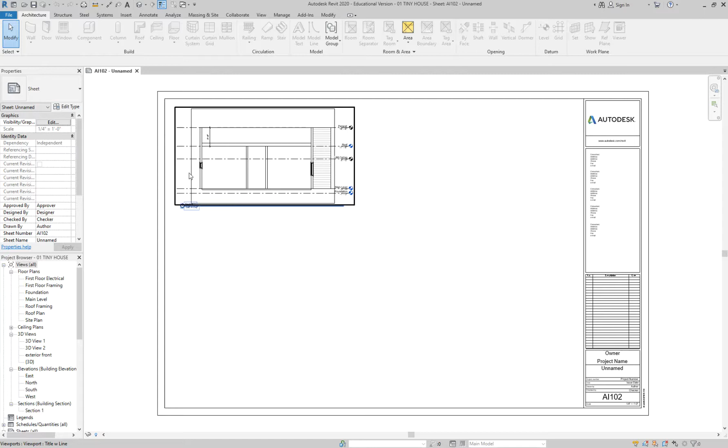So as I mentioned, I'm just going to make a quick section here, and then what I'm going to do is undo everything and go through the whole thing step by step. Again, not taking quite as much time because it is a review, but at any point if you have questions or need me to slow down, let me know.

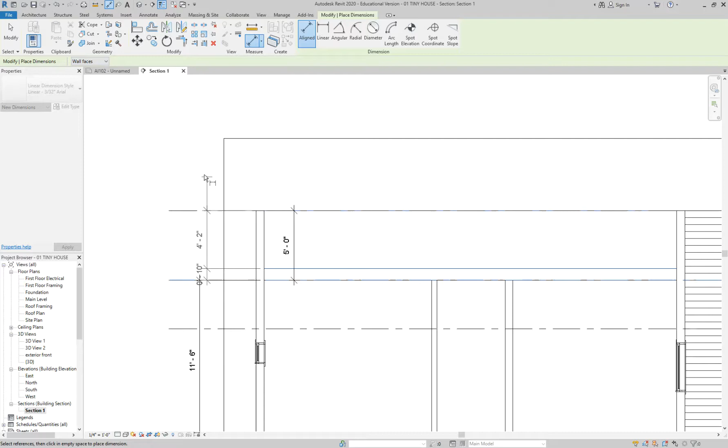So coming to section 1, I'm going to do it in the actual section. I've got my floor here at 0, and then we put our roof starting at 11.5 feet, and then I have a 12 - I guess I did a 10-inch roof. That should have been 12. I'll fix that. And then I've got a parapet that's 4 feet 2 inches.

The other thing that I should also mention that's not shown here, I'm going to do this with the reference plane, is that I also wanted to take into consideration that there is - I erased my drawing, so I can't remember if I did 1 or 2 feet of ceiling plenum. Was it 1.5? Okay, so here's the 1.5.

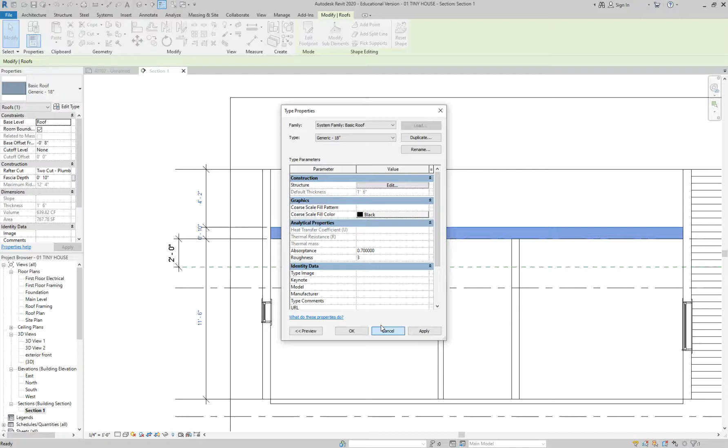And got my roof there, and what I'm going to do real quick is edit my roof type, because that should be 18. Let me go take a look at that. Yep, it says 1 foot 6 inches, but it's also saying 10. That's so strange. Let me play with this real quick. I don't think that should change anything, but I'm just curious.

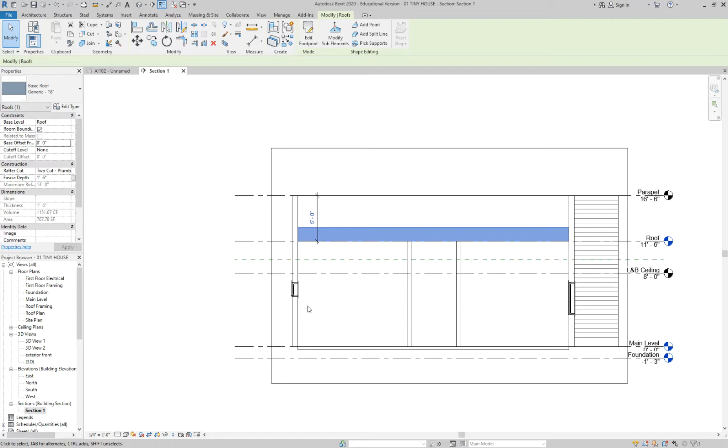Okay, so let me go through and redo my dimensions real quick. Okay, so these are the dimensions that we'll work with.

Okay, so for this particular project, we are going to put the bottom, or our ceilings, at 10 feet. Not all of them, but most of them at 10 feet. We'll have 1.5 feet of plenum, 18-inch structure, and then 3.5 feet here to serve as our handrail. So those are the dimensions I'm going to use just for this example.

They may have been slightly different on Tuesday, but this is what I'll use to drive. And in fact, have that line, that dotted line - the reference plane, that's okay. This one right here, yeah, that's just a reference plane for me before I get this started.

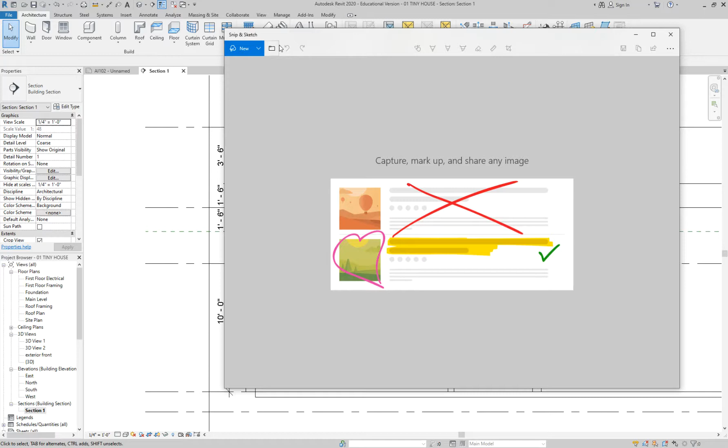So I just wanted to keep this here, and what I'll do, I'm going to do a little snip of it so that I can come back to it and show you guys what we're working with. That way you guys will have these notes at home instead of just on the board. So that's what we'll work with right now.

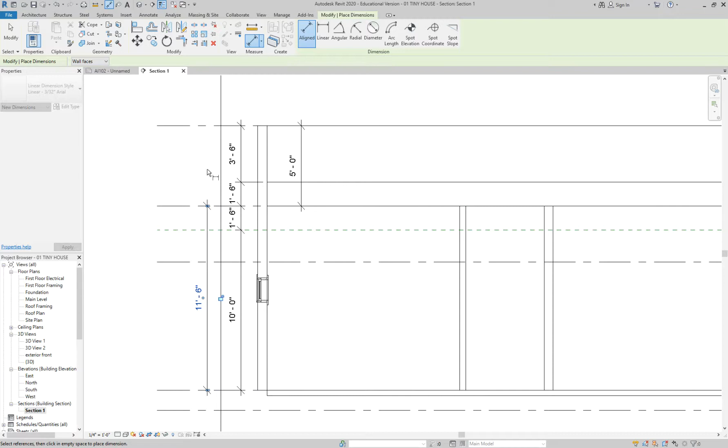And actually, one other dimension I'm going to put in, since we don't have this dimension right here, I'll just do it right here to the bottom of that joist right there. Whoops.

Heather, does that help a little bit? Because then you'll at least have this one right here. We can add this one later. So let me take one more snip.

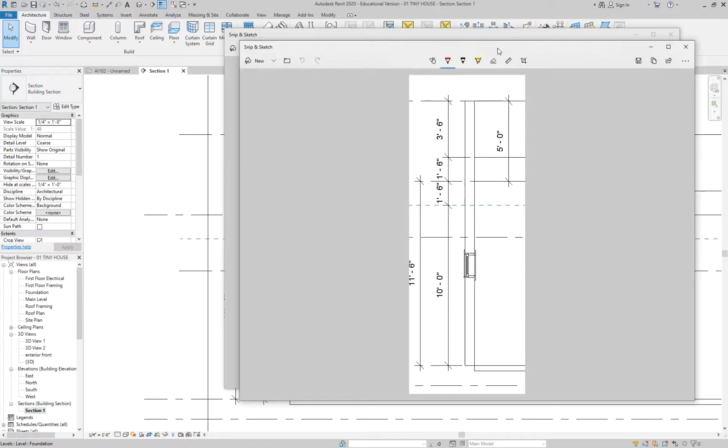Okay, so I'll keep pulling this up just so we see what our dimensions are. I'll scooch it over to the side for now. But what I'm going to do is I'm going to come to my main level, and before I start working, I'm going to undo some stuff.

So I'm going to go to my roof plan, and right now I can't see my roof. Can you guys tell me 2 different ways, or maybe even more than 2 different ways, that I can select my roof from this view?

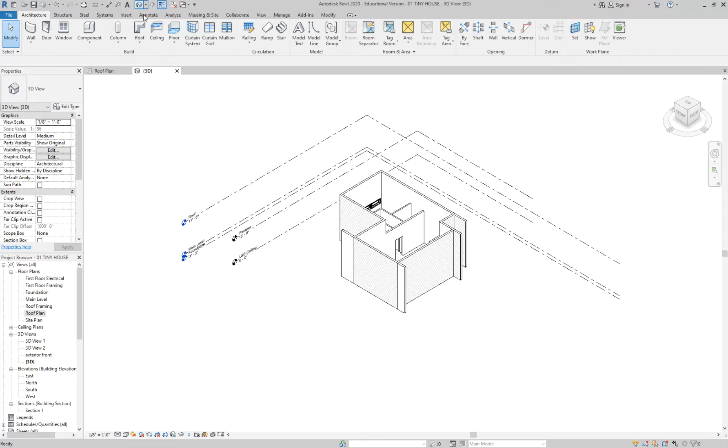Yeah. Yep, so I can hover and I can hit tab and it starts going through and eventually it finds my roof and I can hit delete. And then the other thing that I did in the last class is I had the 3D view open too. And let me do Control Z. That also allows you to go into the 3D view, select the roof, and then I can come back to my roof plan and keep working on it.

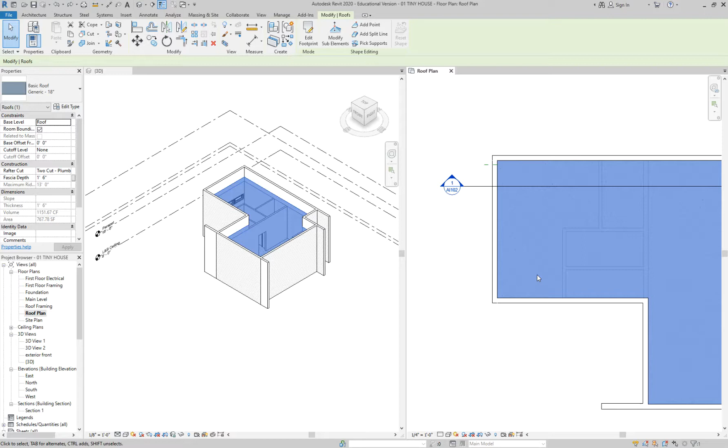But you can select things in different views and then return to a different view. Does that make sense? I think in the last class I gave this example with the floor, not the roof, but they're just, since they're both planes, they work similarly. Okay, so I'll delete the roof to get started.

And then the other thing that I'm going to do is, when I started class last week, let me actually go to an elevation view. I didn't have all of these different views. I just had the roof level. So I'm actually going to delete the parapet, and I'm even going to delete the laundry and bath ceiling for now.

Okay? So I've deleted the level that these used to go up to. So now when I click on them, do you see how they've been unconnected? Because that level is gone. Do you guys remember a way that I can quickly select these walls and take them back to my roof level?

What was our little cheer? Catherine, do you remember? Hover, tab, click. Good, yep, so I hover over one wall, I tab, and it gets a good majority of them, but not all. So I clicked to select them, now they're blue.

Do you guys remember what key I can hit to add walls? Good, so right now I'm hitting Control. On my screen I can see a plus, but you may not. And I'm just going to keep holding Control until I get all of these walls right here.

So right now if I look at my properties, my top constraint on all of those walls are unconnected. If you do that, you might see nothing. It might be blank. And sometimes it's blank if your properties for those walls have more than one property. Like if one of them was unconnected and one of them was still connected to the roof, it just wouldn't show anything, so it wouldn't contradict itself. Does that make sense why it would be blank sometimes?

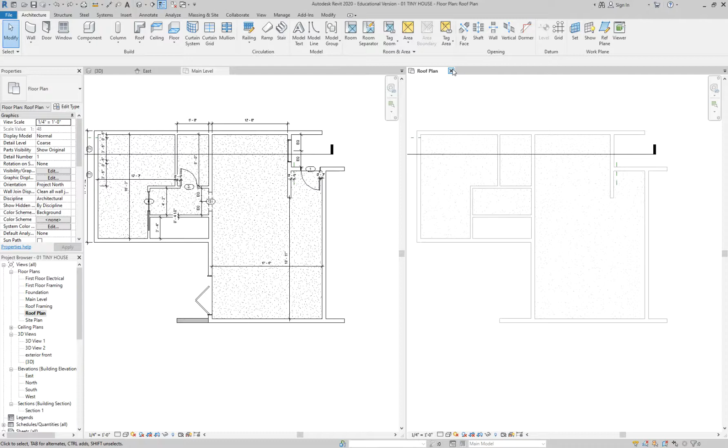Excuse me. Let me do this real quick. Give me one sec. I'm going to see if I can reopen the tiny house. Woohoo, I didn't hit Control Save, so I'm right back where you guys are.

So let's go to our roof plan. And the first thing, can I ask one question? Absolutely, you can ask questions at any time. Why, maybe this is a dumb question. No. Why do you have to create a section to edit your levels? How come you can't just do that like in an elevation?

Oh. You do the same thing in an elevation. Kind of. Let me show you why. Brooke, do you mind shutting the door for us? So the reason why I did it in section, let me just show you the difference.

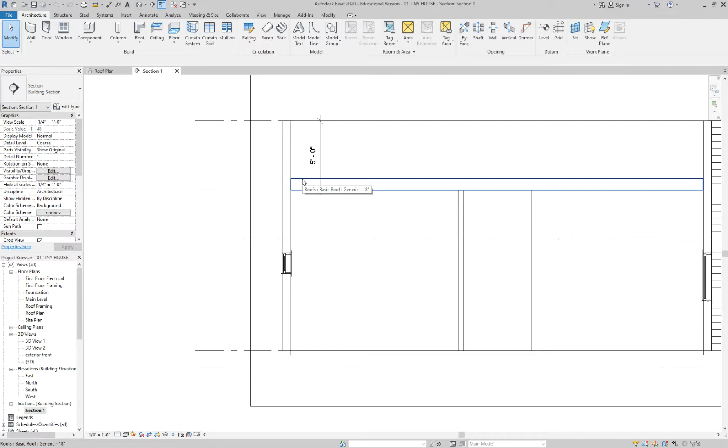So in the section, I can see the floor. I can see where the bottom of the roof structure is. I can see where the top of the roof structure is. But in elevation, do you see how, especially right now, I just see the top, or the top and the bottom?

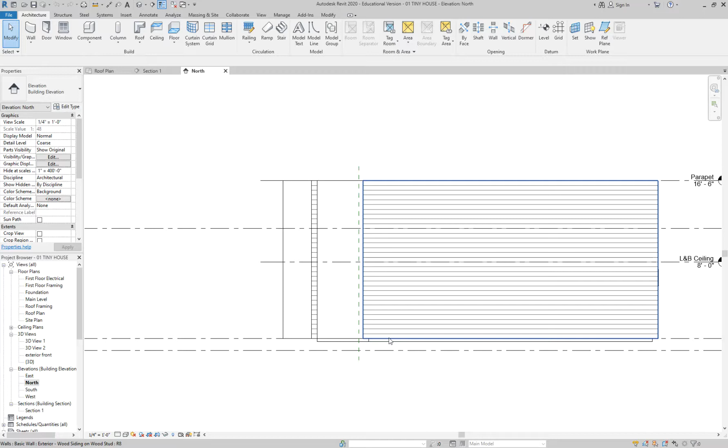So by cutting through the building, I get to see more of the structure, so I can actually see where the levels are. Does it matter where you cut it? Because you cut it in one specific spot and told us to cut it there. The only reason I did it there is that if I cut it here and told you guys to go through the kitchen window, if somebody else didn't go through the kitchen window, maybe they wouldn't see those two walls.

And what would happen is they would stop listening to me and wonder why they don't see those two walls, where's that window. Then 10 minutes later they'd be like, wait, I lost you. So really that was just me trying to get your screen to look like my screen.

But you can really cut them anywhere as long as you're cutting through what you want to see. And luckily for us, not even really luckily, we're just trying to work with the floor, the ceiling, and the roof. So we could essentially cut it anywhere.

Yeah, you could look at it the other way too. Yep, I like the voguing you're doing.

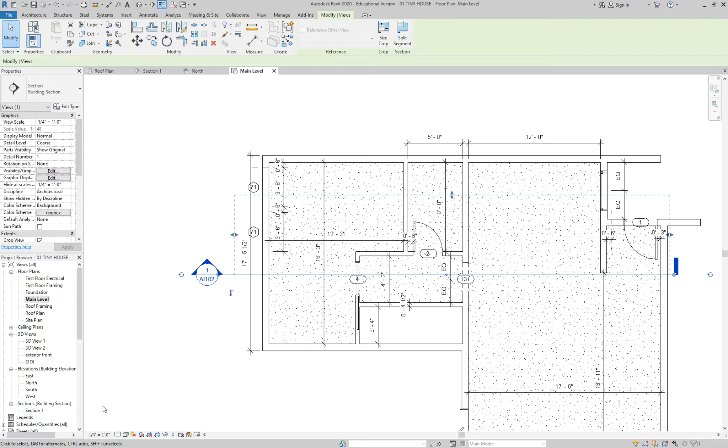Now the other thing that will matter later today, when we start putting in our ceilings, remember how I said the laundry and the bathrooms are going to be lower? That will matter, because if we took our section and moved it back here to the hallway, that doesn't show us anything. If I go back to section 1, see how that hallway doesn't help me see where the laundry and bathroom ceilings are? So in that particular instance, it would matter.

You want to cut through the bathroom. Yeah, but for now I'm going to undo that. I just hit Control Z, it went back to the old view. I'm really just worried about the roof and the floor relationship, and eventually the parapet.

Okay, and you can make as many section views as you want. Yes, they're free, as many as you want. The only thing I ask is, when you turn in your plans, see how mine is placed on a sheet right now? If you have one that isn't placed on a sheet... oh, we haven't gone over that yet, I'll go over that a little later. I'll put that as a side note. If we get to it, I'll get to it today, but it's actually next week's lecture.

But I'll show you how you can turn these off without deleting them. Yours says it's on a sheet and mine is blank. How did you put it on a sheet? Same as any other view. If I go to my browser, here's section 1, pretend that's a floor plan. How did you get your floor plan? Just a drag and drop right onto the sheet. So any view within your browser is really just a drag and drop onto the sheet. Okay, those are all good questions.

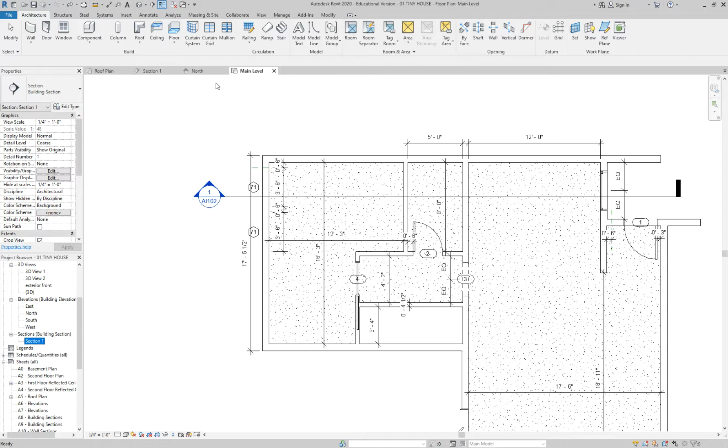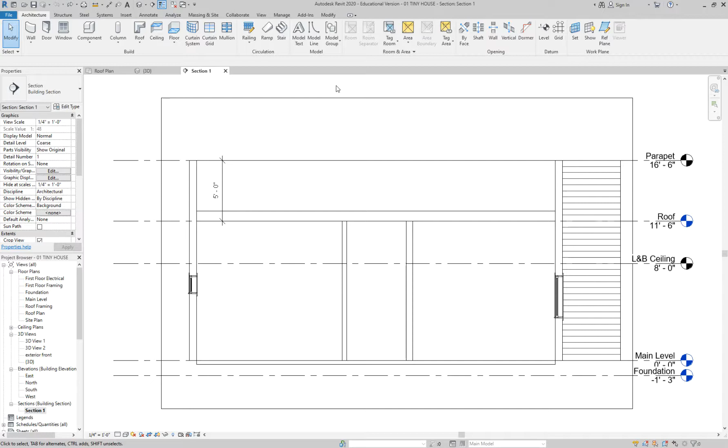All right, so now let's go through and try to clean this up, starting by making our screens look similar. I'm going to go to my roof plan, close out of my main level, and get the 3D view and our section again, then let's tile those. Wow, this never happens, I got it first try. Woohoo! So this is where I'll meet you guys.

All right, I don't hear as many clicks. Are you guys ready to start undoing?

Okay, first thing, let's get rid of our roof. As Julianne mentioned earlier, you just hover over any of these walls, don't click, and start hitting Tab. For me it was 2 tabs before it found it; for you it might be less or more, but you'll see on your cursor it should say Roofs, Basic Roof, and then click. You should see it highlight in your section view and in your 3D view. Now it probably would have been just as easy to come into our section and hit delete, but it was good practice, I thought. Okay, then go ahead and get rid of it.

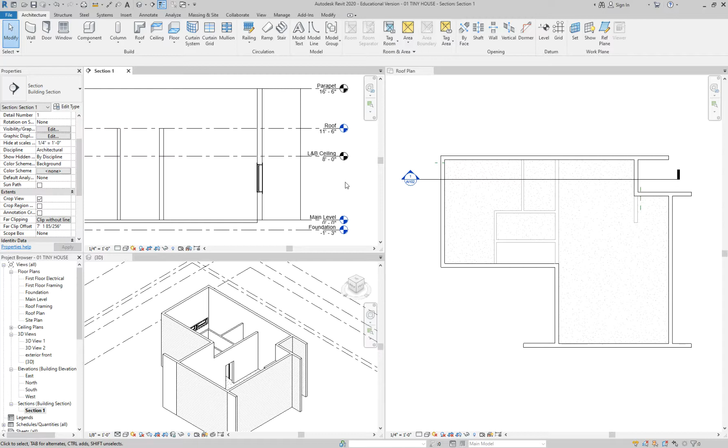Before I delete too much, Heather had a great question last week. She was asking why in our section and even in our elevations, some of these are blue and some are black.

Blue is what Revit is trying to copy from links online, like when somebody sends you an email with a link, it's typically blue. So if something is blue, it's a link. Right now, section is highlighted and these two are grayed out, see that?

When I double click on that blue marker, it takes me to the roof plan. Now roof plan is highlighted and section is gray. If I double click on the section head, it takes me to the section. So it lets you navigate towards the different plans.

It links to them. Now with this laundry and bath ceiling and the parapet, these are just elevation markers. They don't have plans or views associated with them, so that's why they don't link to anything. Let's grab these two and delete those as well, doing that in my section view.

After that, let's try our hover tab click in 3D to get our walls back down to roof height. Go ahead and give it a try. I'm going to come hover over one wall, hover, tab, click.

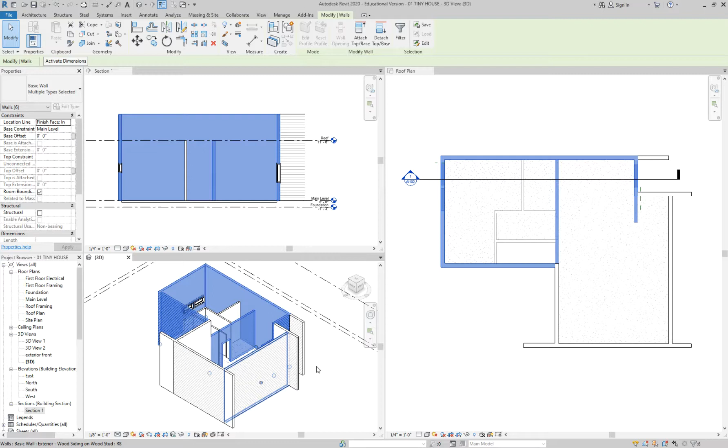Now in this instance, if you look at my screen, see how it got an interior wall that I don't want to select? I'm going to go into my floor plan and try that one more time. Oh shoot, it didn't get it. But to deselect something, you hit the shift key - not delete it, to deselect it. So control to add, shift to take away.

Eventually, once you get all of your walls, remind me where to go from here. So from here, I want to do top constraint. They're all unconnected, and I want to move it down to roof.

This is interesting, I didn't notice this. Do you see that it says basic wall, multiple types selected? I didn't realize that I even had different types of exterior walls. So I will do all of these - we did wood siding on wood stud, right? I'm going to change all of those to be the same.

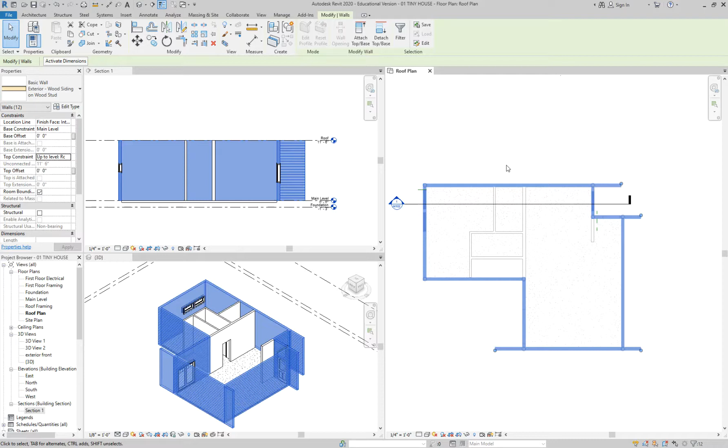Once you get that done, let's give it a test by taking our roof up to 12 feet, just to make sure all of those walls move up with it. And then take it back down to 11.6.

So you just put in the elevation height there then? Yep, you should be able to first just click on the elevation marker and then one more time to activate the number - one to activate the number. Everybody got that okay?

I've got a wall that is not happy. That's okay, so what you can do, you don't have to grab all of them at once if you find that it's giving you trouble.

If I go back to my 3D view, let's say that when I do my hover tab click, it only gets those 3. Well then, go ahead and change those 3, and then you can come on the next wall and do hover tab click again. The hover tab click is just to help you quickly select walls.

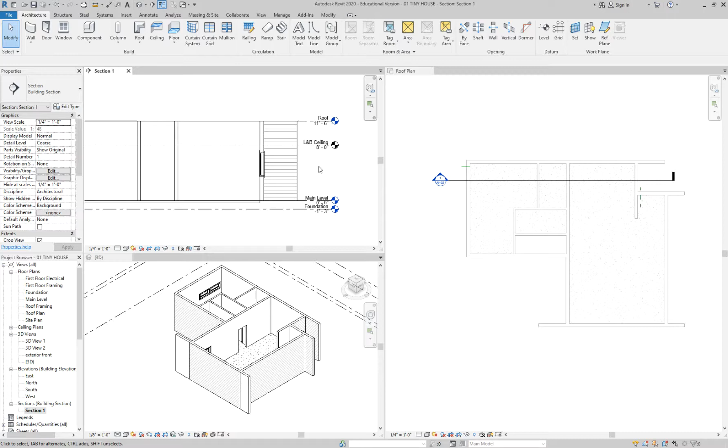I'm just going to call it L&B ceiling. Did we have that at 8 feet about? Okay, let's do 8 feet there. You can check your work if you did the level correctly by looking to see if this is blue or black.

How did that work for you guys? Good? All right, ready to move on to the next thing? So the next thing we could do now is start drawing our roof and then extend the parapet up. Does that sound good?

When we're working on our roof plan, we are creating a boundary. Tell me a couple things that you guys remember about boundaries. What should you try and avoid? Okay, we'll go in a circle. Catherine, I'm going to start with you. When you're drawing boundaries, tell me some things you should try to avoid that might make it so it doesn't create a roof or a floor.

Overextending your lines. Yeah, yep, so make sure you don't overextend, right? Julianne, what else? Kind of the opposite of that. I wasn't paying attention, I'm sorry.

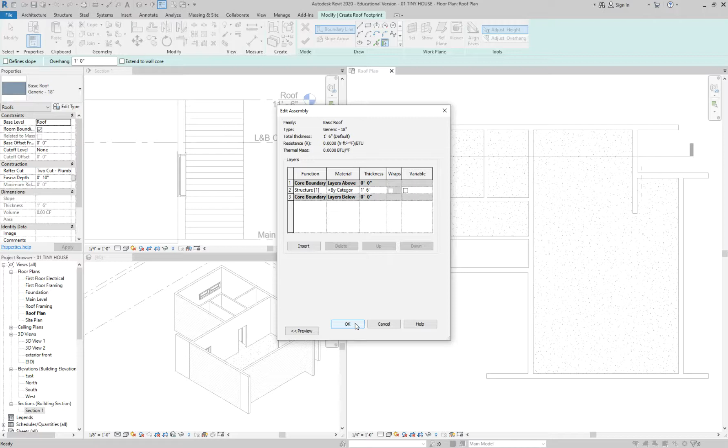From here, I like to use the line tool to draw, but you guys can use any one of them. Let's just go ahead and sketch around that perimeter.

So that's filling in the roof from 11 foot 6 on up to the 13. Since I'm on the roof level, 11.6, and it should go up 18 inches. We'll see if it's going to be nice. I had to change some things at the beginning of class to make it look right, so we'll see what it does today.

So when I do my roof, it goes on the floor. Make sure you look at what level you're drawing on. See how right now I'm in roof plan? What plan are you in right now? First floor. There you go. Right, now look at my screen again. What do I need to do in order to actually create a roof?

Green check mark. Did the green check mark haunt anybody since Tuesday? Not yet? Okay, it might. Just remember, if you get stuck, this really light blue kind of crest color is trying to help you. Just click on it and look for that green check. It essentially won't let you do anything until it knows that you're done drawing.

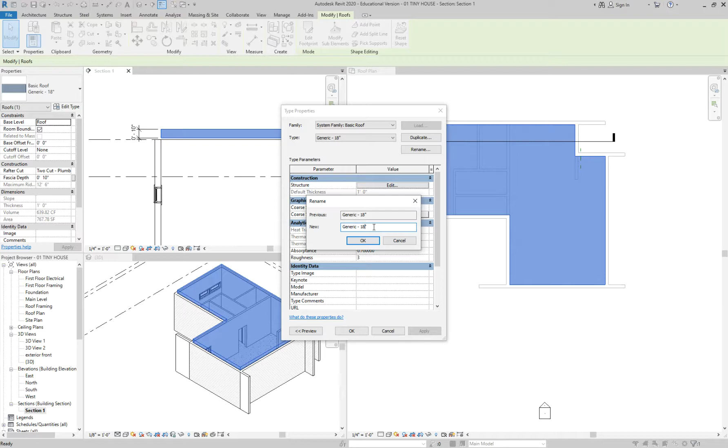Oh, whoops. I should have duplicated that because now I say 18 inches, but it's only a foot. So let me do that the right way. Now let me rename it and make it 12 inches. So this time I am actually renaming it. Oh, but it's already in use. Okay, cancel that, sorry, and it says that there's already one. Yeah, so cancel it. Select your roof and just grab the generic 12 inches.

Interesting. And let me know if that changes anything or if it still is 10 inches. Mine brought it down to 2 inches now. Really? Crazy. 10 inches? Okay, all right. So Heather, I will fix yours too, but for everyone else, I think this is what's happening.

So do you see right now under construction it says the fascia depth? So on a roof, essentially when you're looking at the front of a house, there is this part of the roof. Let's just say that the house comes up something like that. This right here is called the fascia. So it's essentially the face of the roof, just this little part right here. And right now the fascia depth is being set by Revit to be 10 inches, but the actual roof itself is 12.

Since we've done a flat roof, I think what Revit is trying to do is compensate, and so it's taking our roof and squishing it so that we don't have an angled roof for the fascia. Does that make sense? Typically, if you have a sloped roof, you have a whole bunch of roof for that fascia to butt into. We don't have a sloped roof, we have a flat roof coming into it. So what I'd like you guys to do is match your fascia depth to our 12 inches. Change that to a foot, and the roof should fix itself.

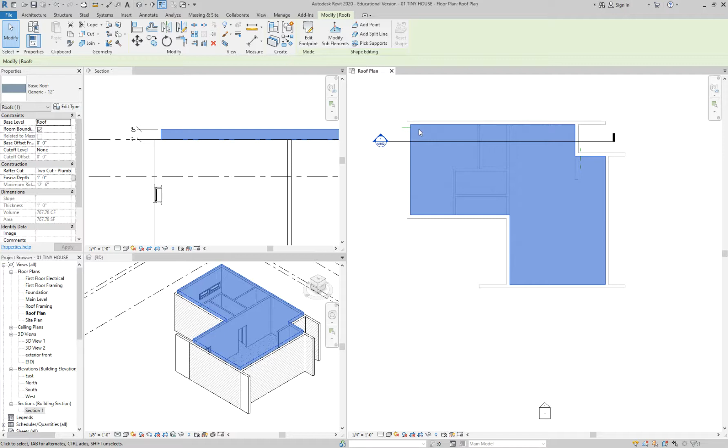Okay, so this is kind of a new feature. I've got a question here. Go ahead. How do we get out of this blue screen? Ah, it won't let you escape out of it? What you have to do, you see a green check mark? Oh yeah, okay, so the X I don't want was still there. Yep.

It heard me say, has it come to haunt you? I'm going to get somebody. And it just happened to get David.

Okay, so far so good, everybody. So something new: if you're doing a flat roof, your roof thickness needs to match the fascia thickness. In previous versions, Revit automatically compensated for this, so there must be a new modeling feature, or maybe manufacturers complained their fascia was being shrunk to fit a roof it didn't fit on, so now they're shrinking the roof to fit the fascia. So if we had an 18-inch roof, we'd need an 18-inch fascia. And in a flat roof, you actually don't even need a fascia.

Right now, with the farmhouse style, it's going two ways. People either have a really thick black fascia or none at all. There's a few houses in Holladay where it just looks like a brick house with maybe a 1-inch reveal of the roof because they've hidden the structure behind the brick. So it really changes the design depending on what you want to do, but Revit will do either one. You just have to remember the fascia, so that'll be new.

Maddie asked: when I click on my roof, I don't have the outline, how do you get it? You didn't lose your roof, you don't have an underlay. Go into your properties in that floor plan and look for underlay, and right now your range base is probably set to none.

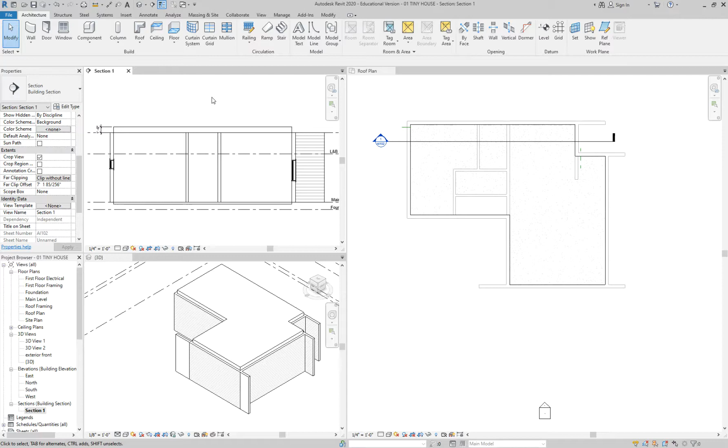So I'm going to show you guys a slightly different way to do the parapet, but both ways are right. Let me ask you: if we were to do it using an elevation, would you feel comfortable, one, creating the elevation level without a plan, and two, grabbing the wall and sending it up? I don't see a lot of reassurance in the crowd, so let's do it that way, then undo it and do it the second way. It's review day, so let's do it both ways.

So coming here, the first step is to create the parapet level. Everybody zone into what we're doing, I'm going to start calling on you guys. Riley, I'll start with you. Pretend I've never used Revit before, where would you start? I would click on the roof line and type CS to copy. Good, so we're going to do CS. And then, before we get too far, David, what else would you do?

LL? We've already done that, we're already starting to make the level. But do I want to make a plan with this, or is it just a reference? You don't want the plan, so you just uncheck the plan box. So I'm going to deselect this because it's just a reference level, and then from here I'm going to go from left to right.

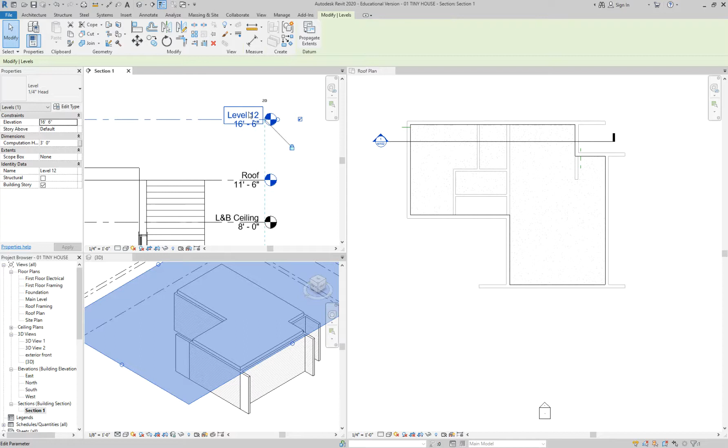Ash, tell me how to edit this. I have this on here. Click. Yep, and then start typing. So I... or click again, yep, click one more time. Good, so I'm going to call this parapet.

Abby, now that I've created this parapet reference level, how do I take walls up to it? You select whatever walls you're wanting. Yeah, so I'm going to grab this wall right here, I selected it, and then you go to your properties. Under... top, it's in the constraints. So top constraint is now parapet, and I can tell it worked because it shot it straight up.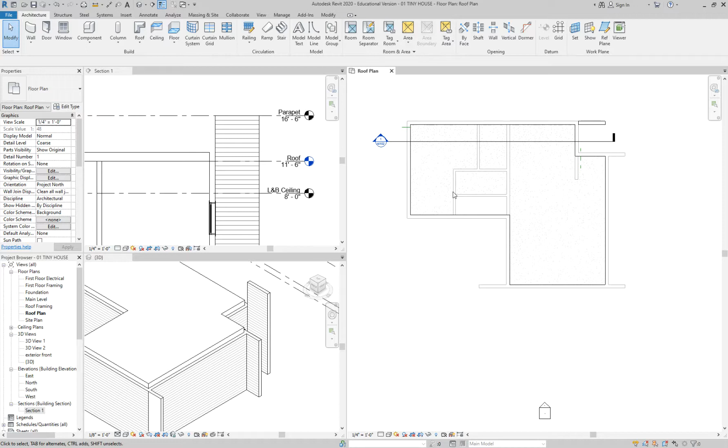So you select it in roof plan? Yeah, you can select it anywhere. I actually selected it in the 3D view. But in roof plan, your walls are below you, so you can't select them there. I have my 3D view here, but we can switch back to a floor plan in just a minute too if you guys want. So you can select it in floor plan, not roof plan, since this is just an underlay of what's below.

So if you select that elevation, then you go select your roof type, or the wall type? Yeah, so you mean select that wall? So first select the wall, and then in your properties you can tell it where to go. So before it was at roof, the top constraint, and now we're moving it up to the parapet.

Did that answer your question? Okay. Can we select multiple walls? I haven't tried it yet. Yeah, absolutely. So I'm going to go hover, tab, click. So I got 3. I'll take those 3 and I'll take them up to the parapet.

Now I don't want you guys to do all of the walls because remember we're going to undo this and try it one other way. You can do all of them, you know, it's all good practice, but I just wanted to make sure that you understood that whole process.

So now let me ask you guys again. Do you guys feel comfortable creating a new reference level and selecting walls to take up to it? You guys feel okay about that? I think the one important thing to remember, if you're just making a reference level, what should you make sure to select? Or deselect? Yeah, make plan view. Yeah, make sure to turn that off.

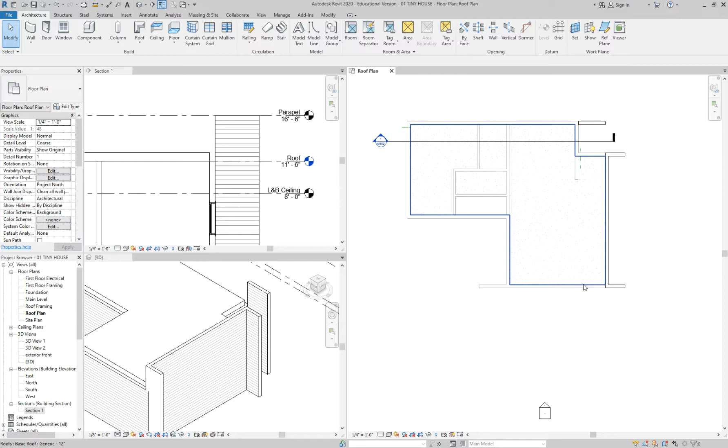But there are times where you do want to create another level. You might be creating a balcony, a second level, maybe even a basement. But for now, we're just using it for reference.

So I didn't get the wall to go up to that. Okay, let's do it together. So just click a wall. Any wall. I'll select the wall then, level. So the only way to move it is to select an object and then edit its properties. Do you see now it says top constraint? Sorry? Okay, wall. Oh, it's level, yep, parapet. Or whatever you named it.

Okay. Did that work for you? Abby? So I'm getting an error when I try to move a wall to the parapet level. What does it say? Cannot cut anything. Instances of the wall cannot cut anything. And you're doing it from your top constraint? Maybe not. I think it'll still let you move it up. Maybe what's happening is before, since we already had it up and then we moved it down, it might just be looking for a roof to be cutting through again, but I don't think it should stop you from letting those go up. I was using the base constraint. Ah, there you go. Okay, good. You're welcome. Okay.

Let's try it the other way as well. And truthfully, I have seen people use it both ways, but I love the control of having the parapet level. So if I want to change the parapet, like for example, let's say that we made our parapet only 3 feet high and we decided to do a roof deck. The city would say 3 feet isn't high enough to be a guardrail. You have to send all of your walls up. So when we have a level, it's really easy to select this level and move everything up, right? That's why we use levels.

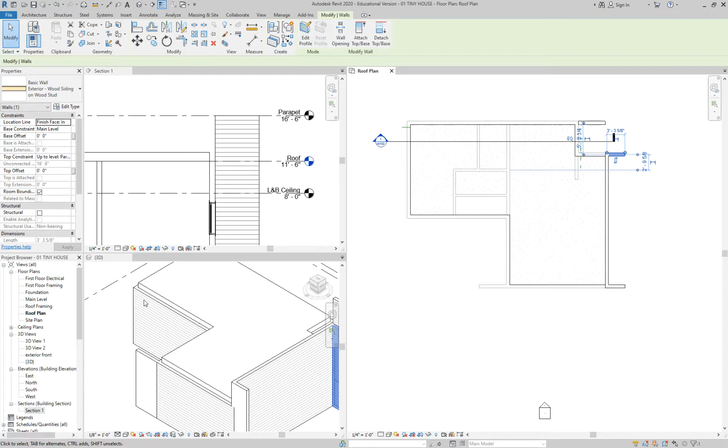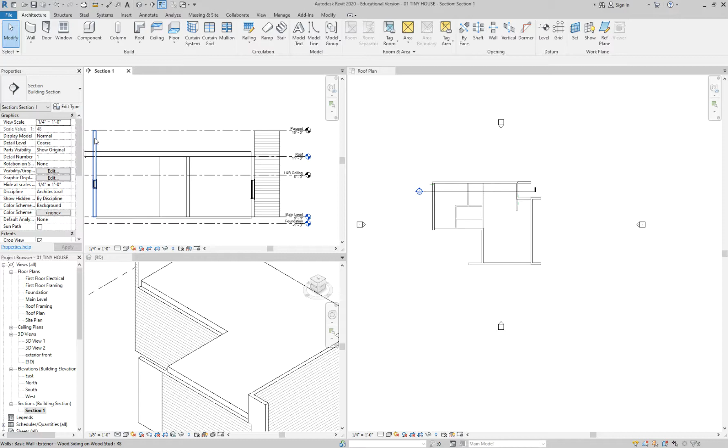I have also seen people, and actually I can just show you this on my screen, but do you see how right now our top constraint is the roof? What I've seen other people do, and actually let me grab a wall. Let me use this wall that's in section. I've actually seen people use this top offset feature. Do you guys see the top offset feature? So I can take my top offset 5 feet and see how that also gets me to the parapet level. Now, if you're using the top offset, you wouldn't create a level. That wouldn't make sense because it's not connected to it. But the power in using a level, let me switch my view so you can see this a little bit better.

So let me do that one more time. Okay, let me back up. So see how my wall's down here?

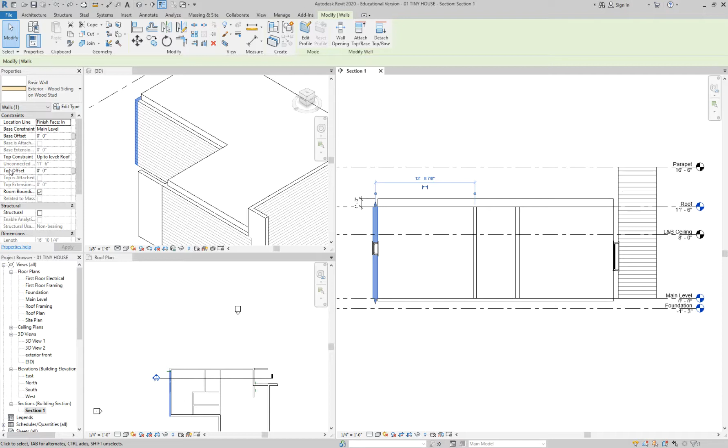Coming to my properties, do you guys see top offset is set at 0? Top offset means your wall top is here, and how far do you want to offset it from that point. For me, it's 5 feet, or whatever feet it takes to get up to the parapet or wherever you're trying to go. That does the same thing.

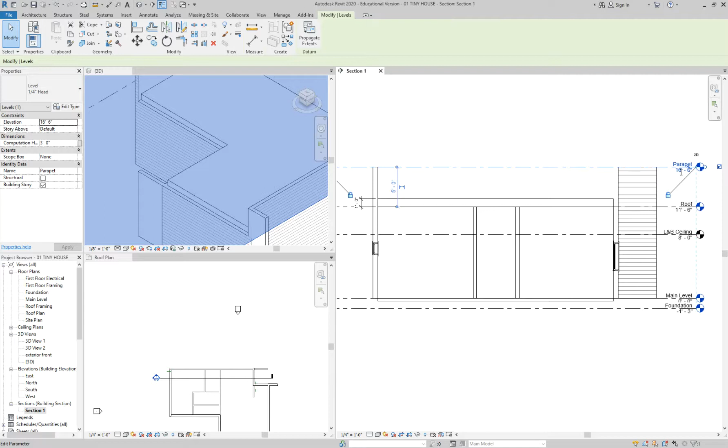The thing this doesn't do is when my parapet changes down, maybe I have a height restriction and can only go up to 14 feet. If you had created all your walls to go up to parapet, they all just move down. If you had them set to offset, now you have to grab everything and move them.

And it makes it easy to manually adjust it. There are people who argue with me who say it takes more work to make a new level, and I'm like, it took me 15 seconds, and now I get to move it up and down. I wanted to show you both ways so that as you go out into your own practice, maybe join other offices, you can show them the benefit of using reference levels, because it makes your work far more consistent. That was really all I wanted to show you with the offset.

So if you get your parapet going all the way around, then you have a stairway going up. You just make a doorway into it. You could make a doorway, or you could even cut a hole in the wall if you wanted to. There's ways to cut holes in the geometry, and then you would just show it in elevation that there's an opening there.

So do you guys feel good about flat roofs and creating those levels? Are you guys ready to move on to ceilings? Okay.

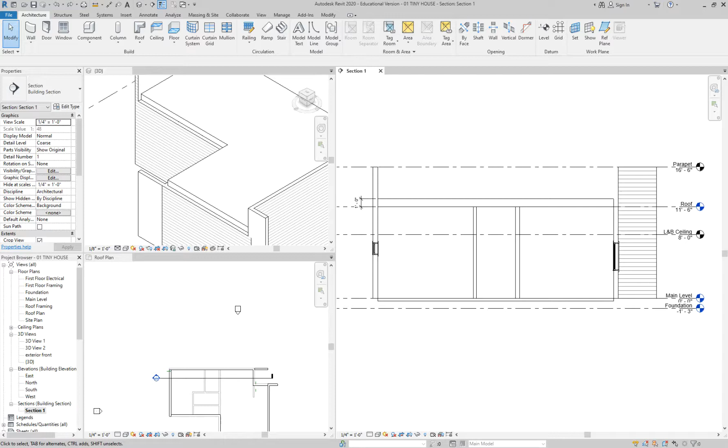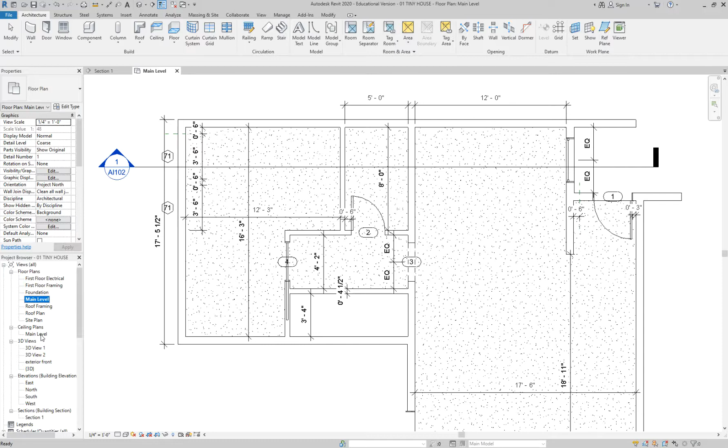Okay, so now if you don't mind, meet me back in the main level. Let's actually, when you are in the residential template, do you see that there is a ceiling plan main level? Let's actually work here. I just had to expand my menu and get to the ceiling plan main level.

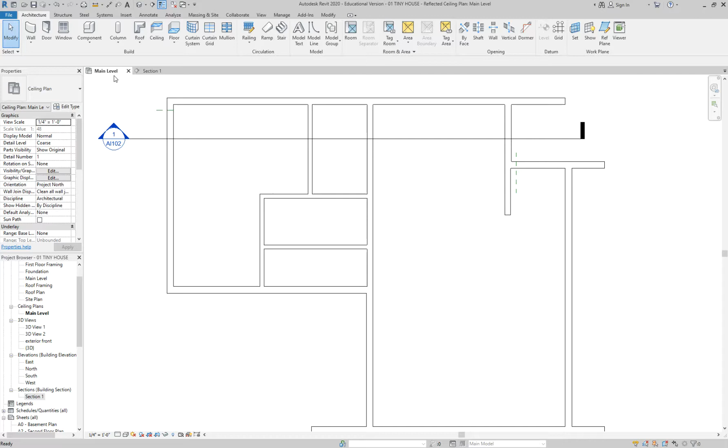And ceilings are another view where I like to work in at least 2 different views. So instead of a section... actually no, section would be good, I should reopen that one. Let's take a look at our section, because similar to our floors, when we first put in our floor, at least in the one we have, we can graphically see it because you can kind of see a pattern on the floor. But some ceilings won't have any pattern, so it'll be hard to see if you've inserted anything or not. So just for that reason, I'm going to keep my section open, and I've zoomed into the bathroom area.

I think that's where I have my section line, let me just make sure. Yep, so it's cutting through my bathroom, and that way if a ceiling goes in, even if I don't notice it on this plan right away, I should be able to verify it in my section. Got it? All right.

Everybody good to go? I have a ceiling plan under listed floor plans. Yep, that's where... oh, you don't have it? Or, ceiling plan, okay, main floor? Yeah. Got it? All right.

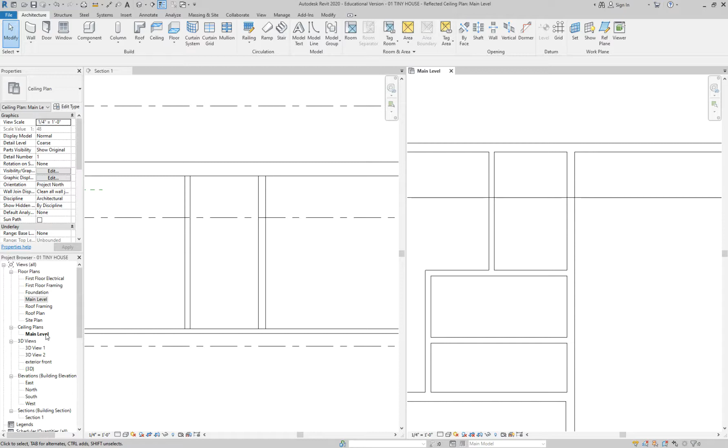Yeah, so to start off, before we even go into our bathroom, let's throw in a ceiling in our master bedroom. It's usually really straightforward. So we've got our ceiling button. And essentially what you do, right now, do you see that it's doing a gypboard ceiling.

And do you remember where we talked about the offset height? So it is making a ceiling on our main level 8 feet up from the bottom. Now, why do you guys think I don't like this? What OCD of mine kicks in? Does it have an associated level?

We're just telling it how high the ceiling is this time. So, it's just something that I have to get used to. But we're gonna go ahead and move that up to 10 feet, right? Because we wanted our ceilings to be 10 feet.

And then what ends up happening, if you take your cursor and move it around, do you see how it's highlighting different rooms? Thanks, Brooke. That could potentially have a ceiling. So right now, if I just click into my master bedroom, do you see, whoops, sorry.

Do you see that it actually put it in right here? Okay. Let's try one other thing. In our living room, okay, we're gonna do that one more time, but I wanna change the ceiling type. Is it giving you a warning that none of the elements were created in this view?

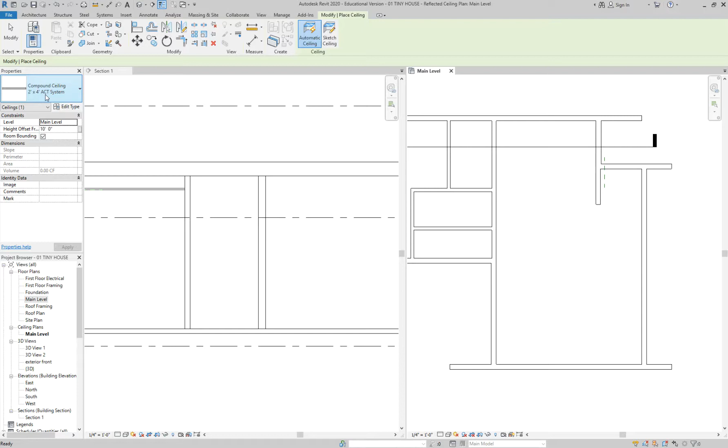Okay, I'm gonna see how we can work with that. Some of these settings change slightly. And so just to make sure I can see the ceiling, I'm gonna move my properties to the 2x4. ACT stands for acoustic ceiling tiles. It's what we see right here. So the 2x4 ACT, I'll keep it at the 10 feet offset.

So it's still giving me the warning that it's not visible. I'll close that. So I do have a ceiling, but I just can't view it from this plan. So let me do one other thing. One moment. Let me go to main level. Okay.

Okay, so first let's just verify we have ceilings, right? Do you guys see that we do have ceilings in our section? Do you see ceilings in your section? Heather? No, I haven't put it in yet. Okay, do you want me to show you how to do that again? So if are you in your main level ceiling plan?

So ceiling plan, and it kind of looks like a square with, okay? So just click on the ceiling button. And then once you do, you see how the rooms highlight in red? Click on, are they not highlighting in red? No, they are. And then you can just click.

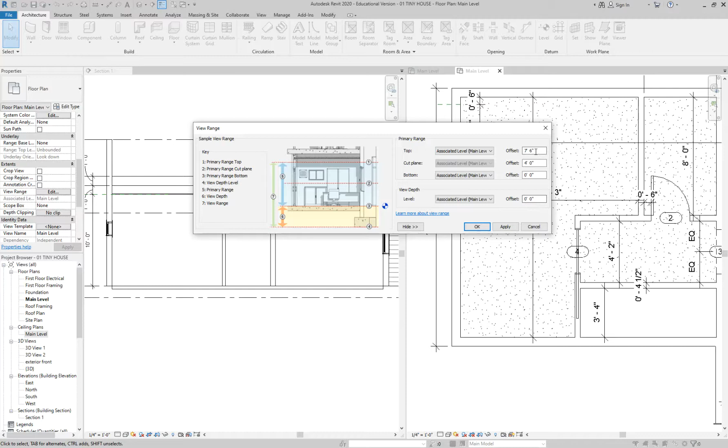Okay, so I'm going to hit X just to get out of there. We don't need to change anything. And I'm actually going to close out of my floor plan. I'm back in my ceiling plan now.

So Ash, this is where we will change some of the settings. Okay, so now you guys can actually change the settings with me.

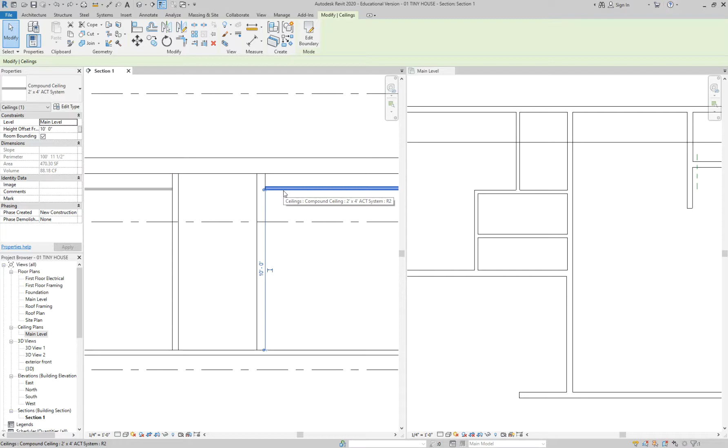Now, before you guys do anything, do you see that my acoustic ceiling tile is a little bit thicker than my gypboard? So in case you don't have an acoustic one or anybody else, click on it and come down to your properties and make it the acoustic tile. Not because we're bad designers and we put commercial stuff in a home, but just so we can graphically see on our plan that we have something.

No, they're both the ACT. Are they not supposed to be? They can be the same, yeah, that's as long as one of them is, so something shows up on your screen. That's okay. But they do look different. Yep, the ceiling, yeah, the same thing. In the section, they look different. Really? You might have more than one. Got 3 lines though. So I was going to say, you probably drew more than one ceiling.

Oh, that's the thing, Revit will just let you click and add ceilings. They're free in Revit, they don't care what the contractor's building. You can keep doing it. What do I hit? Delete. Yep. There you go.

Now I'm back to the compound ceiling. Okay, good. So now I have a floor plan that's telling me I have a ceiling. I can see them in the section, but I don't see them here. So tell me again, in my properties, where can I change my view settings?

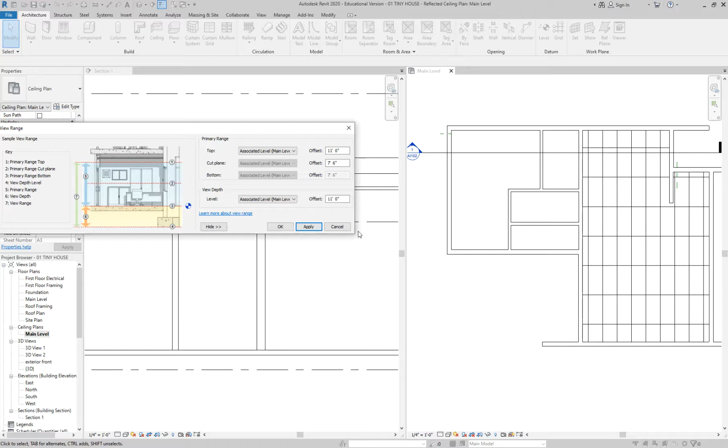Ash, are you okay? I see a furrowed brow. No, it's okay, good, I just put in a lot more ceiling. That's all right. So let me ask you guys, when we did the roof and the floor, how did we select them in the floor plan view?

Yep, so you hover, tab, and then see how I eventually found the ceiling? I think I clicked three or four times before it found the ceiling. What's an easier way for me to grab it in the main level?

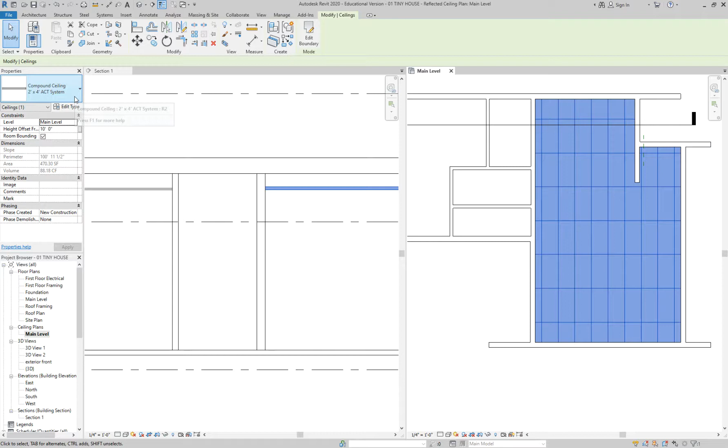Use my other view, right? I've got my section open, so I can just come click in here. I'm going to click on it, and it highlights it in the main level too. So that way, if I know that I don't want the acoustic ceiling tile here, I can change this back to my gypboard. Nope, I don't want metal studs. Let's just do the gypboard on furring.

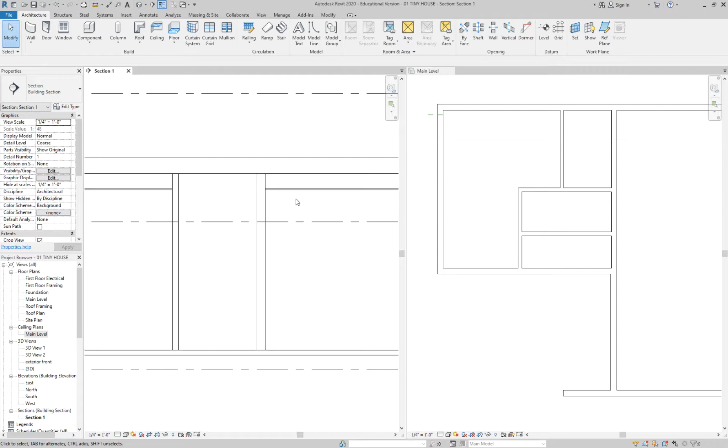So it looks like there's nothing there, because look at the walls right here. See those white walls? Those are chipboard walls. Does that really have any texture to it? Yeah, so it doesn't look like anything's there. There's nothing graphically to represent a chipboard wall, but can you see in section that there is actually something there? Yep, and you'll also see it in your interior elevations once we get there too.

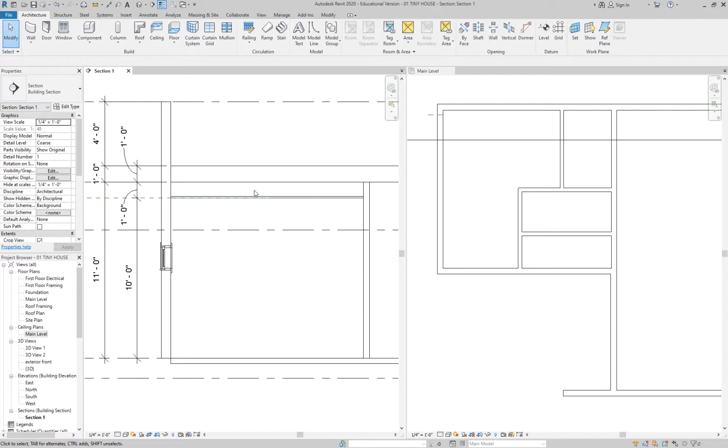So in your project, again, this project and other projects in the future, you can decide how you want to design your spaces. Do you want it to be open to the structure above so you see the lights and the ductwork hanging, or do you want to actually have a ceiling to hide that stuff? I've even seen in houses where people like to do kind of an open structure to above. It's really up to you.

What I'd like to do now, though, we do have these two in here at the 10 feet. Will you guys try to add a chipboard ceiling, I think we said it was 8 feet, right? So put in 8-foot ceilings in the bathroom and the laundry for me on your own, and then I'll walk you guys through it in just a minute.

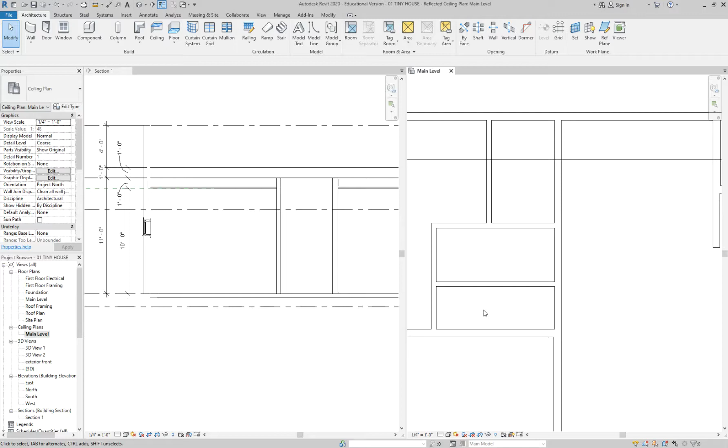Okay, I'm hearing less clicks. Were you guys able to do that okay? Yeah, was Revit being nice? Will you check your section to make sure your new ceiling is at 8 feet for me? Maybe even just with the dimension.

I'm going to catch up with you guys. I'm going to click ceiling. So if I doubled up on ceilings again, I'm trying to click it, hit delete. Pops up an X on the screen. X means it doesn't want to let you delete it. Make sure you're in the right view or hit escape. Maybe you're still in a command that it's not done with before you can start deleting. Try that too, and then I'll come take a look if that doesn't fix it.

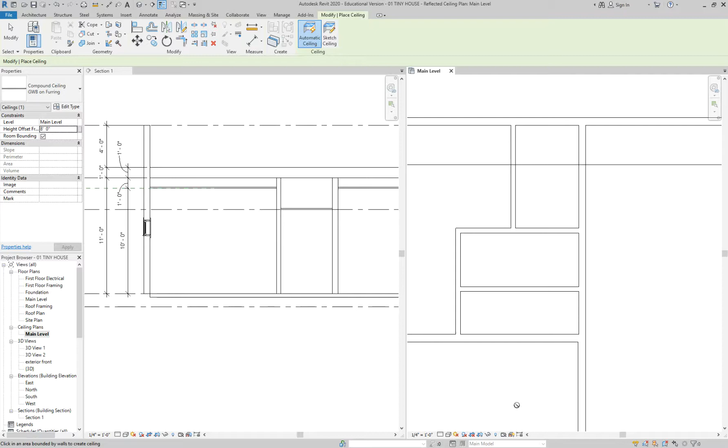And then the section view. It should let you delete in the section. Let me finish mine. So in the section, are you able to highlight it, like click on it? Yeah, I click on it, and hit delete, and it pops up an X mark. Let me come take a look. I don't know what that X mark would be.

Hit escape, now try it. It really likes that. I don't know why it wouldn't let you get rid of it. Hit escape again, and go to your main level and do the hover tab click there. That's really weird, and you actually have to... oh, there you go. Now hit delete there. Oh yeah, delete. Click on it to select it first.

Sorry, over there. You have to come closer into the room. There you go, now click. And it lets go of it. One more time, yeah, click. That's so weird, I think it's very confused. Let's see what we can do.

So I think I just got rid of one of them. I was just confused, it didn't even know what it was selecting, but I'm going to change that to a chipboard.

So grab it over here, grab it in the section. Okay, and now, good. And then change it to 8 feet too while I'm here.

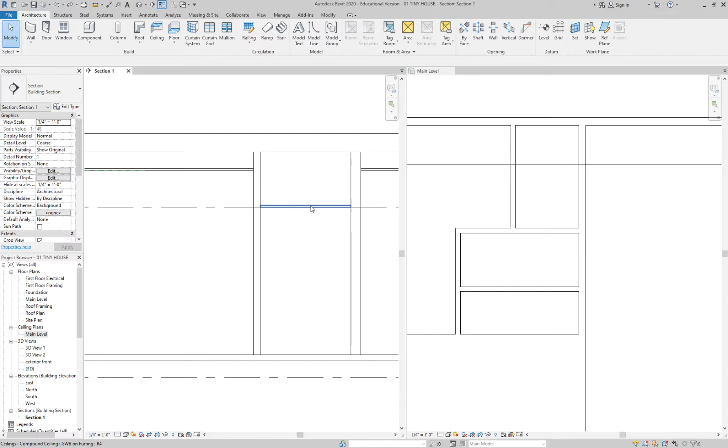It doesn't like to hit backspace. Why, oh, it just got rid of it. Yeah, so it's deleting it. Hit Control Z, it's using your backspace to delete it, which doesn't make sense. Click on it one more time. Now change it back, I think you did Control Z twice, so it undid the chipboard. Hit backspace, try it. Okay, it's happy that time.

Good, and let's change it back to the furring one. There you go, your computer's being high maintenance. That's not you, that's your computer. Yeah, so here, uh-huh.

And I'll change the... it should be... I know why. So don't change it there, you're in your main level plan. You want to be in your ceiling plan. Oh, alright, so see right here, ceiling plan, main level? There you go, okay, thank you. Everybody okay over here, Maddie, etc.?

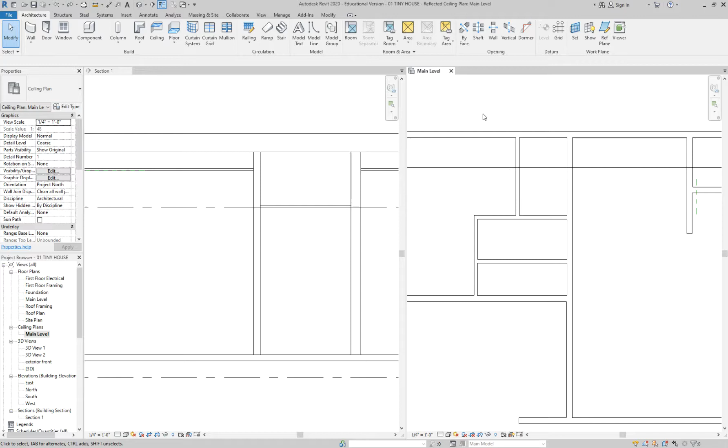Okay, all right, so now that we've got our ceiling plan, I'm just going to show you guys one other thing. This is mainly for Abby and anybody else who wants to do a ceiling plan or a lighting plan in the future. So there is a tab called Systems, and basically everything that gets hidden in the ceiling is in this tab right here.

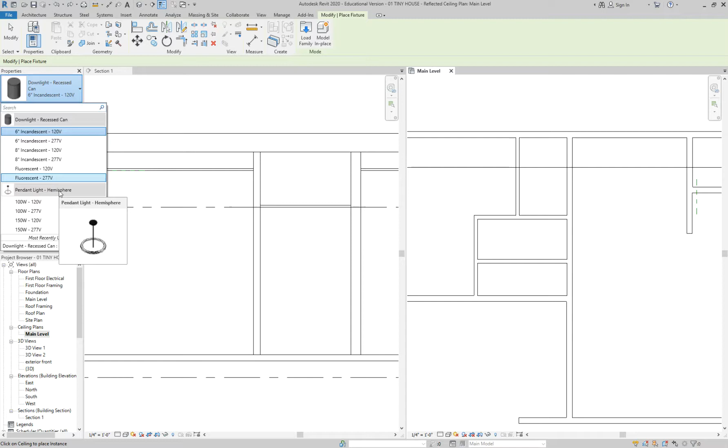And all the way down at the far right, do you see where it says Lighting Fixture? You can click on that, and by default, the residential template gives us recessed cans and pendant lights. Now, I'm pretty sure if you go to Load Family, there are more lights for you to put in.

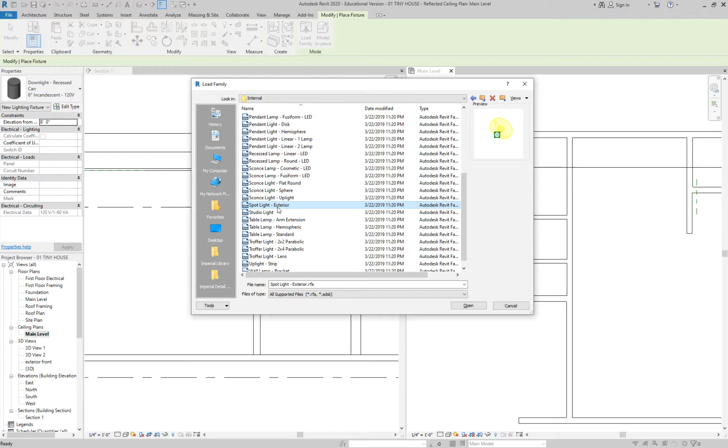Some of these are picky, like for instance, if you guys have taken the lighting class, does a sconce go on the wall or the ceiling? It goes on a wall, so it won't help us in a reflected ceiling plan, but a pendant light would be fine, a spotlight, troffers, all of these things can go in the ceiling. So you can grab any of these, and similar to our doors and windows, see how there's different sizes and wattages you can choose from?

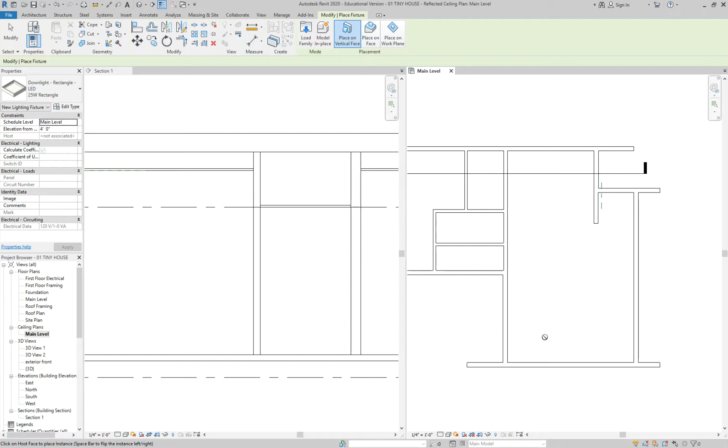Okay, then once they're in your model... okay, it doesn't like this ceiling. This probably, it's a downlight, so I'm wondering if it needs a special ceiling for it to go into, or even it might need the ACT system. So remember when you were putting in windows and doors, they'd only go into walls? There are certain light fixtures that will only go into ceilings. We couldn't just randomly put a light fixture in our floor plan, it needs a ceiling for it to go into.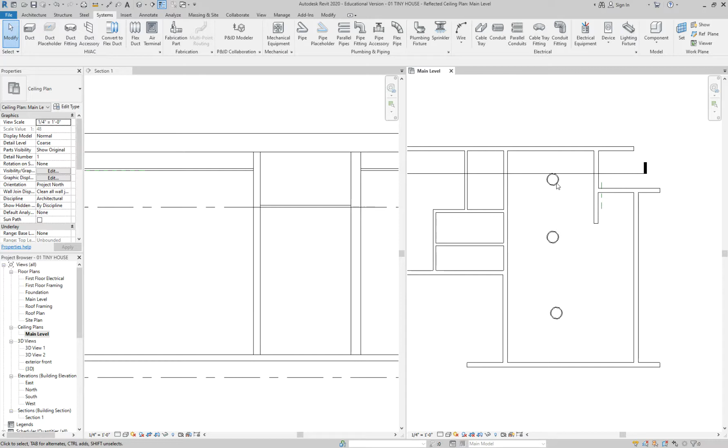Okay, so Abby, once you get to that part in residential construction, that's how you can start putting together your plan. So that's how you get your ceilings in, and you can see I have these beautiful fixtures from 1991 in my section now. It's coming back, guys. I don't know, maybe these are cool again and I shouldn't say anything.

But you'll see it updated—not for our model yet, but for your midterm we will. So I want ceilings. If you want to do light fixtures just for fun, you may, but that's coming later in the semester.

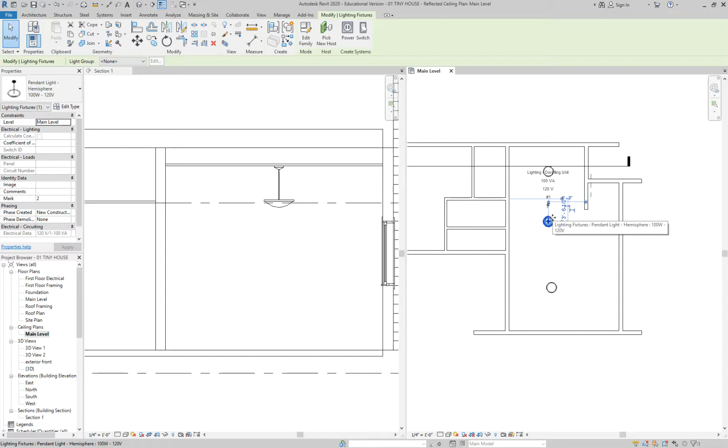We just did some bonus content, so Abby would know how to do it. So when you add something into your file, can you copy it into the other file? Yeah, so to go from file to file, you have to do Control-C and then Control-V to paste it. I think I tried to do that with the doors and windows.

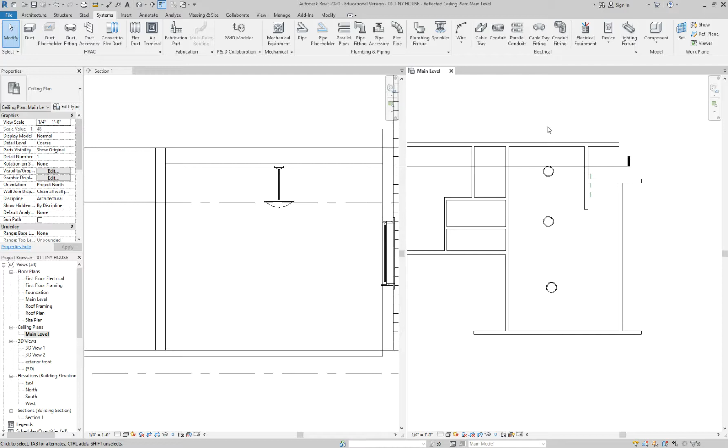You can—with doors and windows, there has to be a wall to host it into, if that makes sense. Like for example, this light fixture, if I were to paste it into a new drawing, I'd have to have a ceiling in order to really insert it. But you can do it, it just doesn't put it into the system or place it. Well, you can, again, it just depends on if the wall is there ready for it to be hosted. So let me just do a new file real quick.

I'll do an architectural template. The reason why I'm doing architectural is that with architectural templates, we don't have all of these ceilings and light fixtures, right? So I'm just going to throw in some walls.

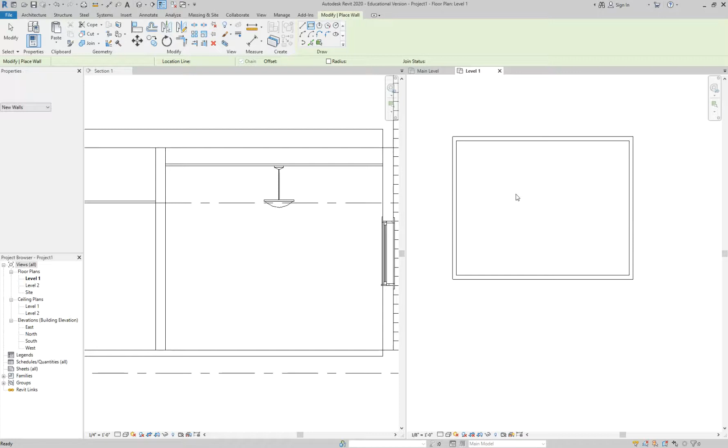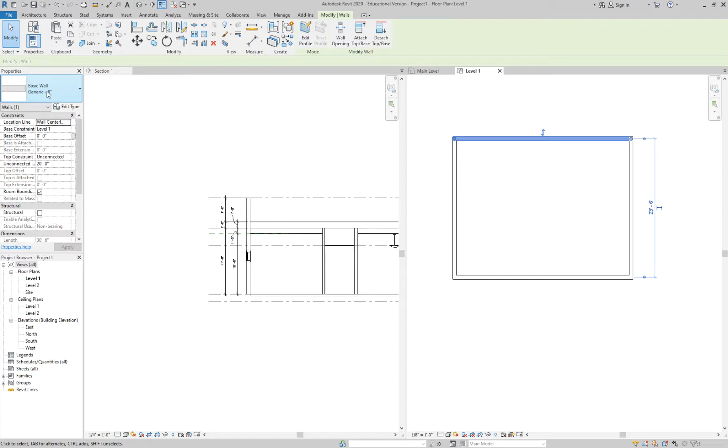And then coming over here, if I were to grab the light fixture, Control-C, if I were to come here, it's pasted, but it's saying that there's already one in here, okay? If there's a wall type, I can copy this. I know that this doesn't have a basic wall exterior siding. Let me just show you. See, no siding wall—I should be able to paste it.

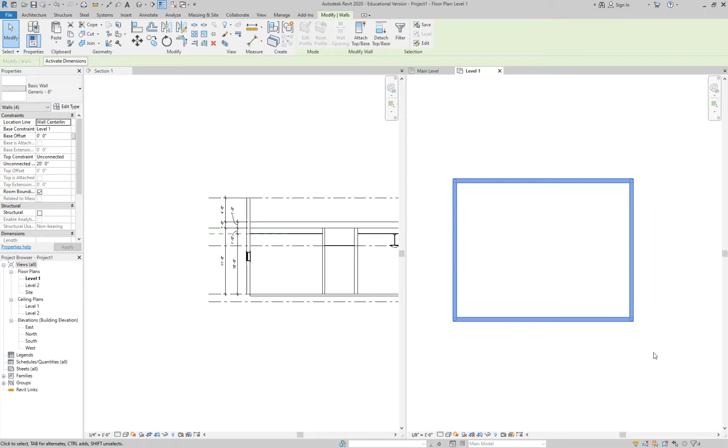Let's see if it's gonna let me do it. So now there's that wall, and now I can do match properties to match the rest of them, or hover tab click, because now it exists in here. So it will let you put it in, but it's always going to look for that proper host. So you just Control-C on the one file, change files, and Control-V—copy paste. And that Control-C, Control-V works universally.

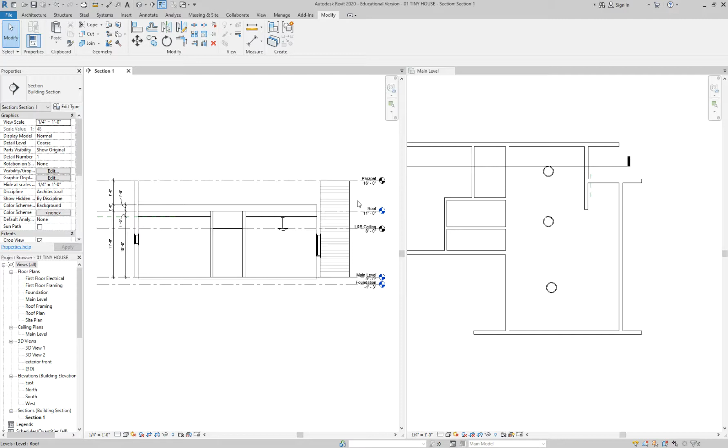So for your homework assignment over the weekend, you are basically just emulating this exact same thing in your 2-bedroom, so hopefully you guys got a start on that. We have the heights and everything over here. And in addition to that, I want you guys to create some ceilings as well—we talked about the laundry and the bathroom.

And you don't have a sheet for your reflected ceiling plans yet, correct? I think you have a roof, but not a ceiling plan. Let me check—I don't think we've made those yet. And I'm assuming by nobody saying yes, we haven't done one yet, right? Okay, I didn't think so. So I'm gonna add that to your rubric.

And what I'll probably do, if you guys need some extra credit, I'll give you guys a few points of extra credit if you want to go through and add some lights and show that on your reflected ceiling plans.

Okay, and then so next, we're gonna drag and drop the reflected ceiling plan onto its own sheet—to the reflected ceiling plan.

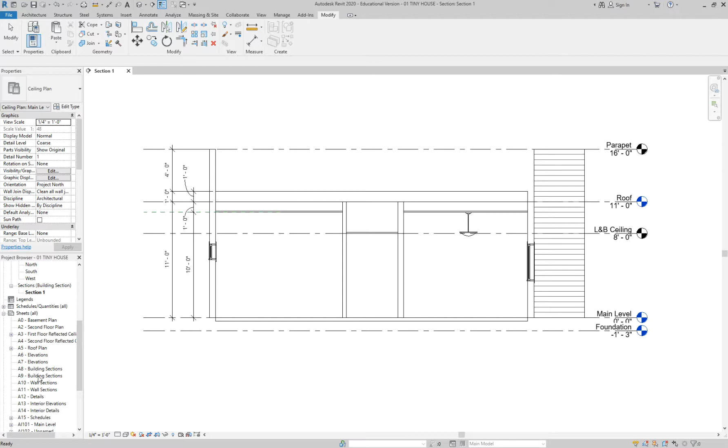Yes, you got it. So that sheet might not exist—I don't think I recorded this at the end of Tuesday's class. So Heather, that was a great question. So if I'm coming here, okay, there is a first floor reflected ceiling plan, but let's say that there wasn't one, okay?

I think, Heather, your question was you didn't have a sheet to put the 3D view on. Right. Would you know how to add a new sheet now? Now we do, because you showed us last class. Let's get it on officially on the recording—how would we do it? Click on sheets, or right click on it, and new sheet. Yes, that's how you would do it.

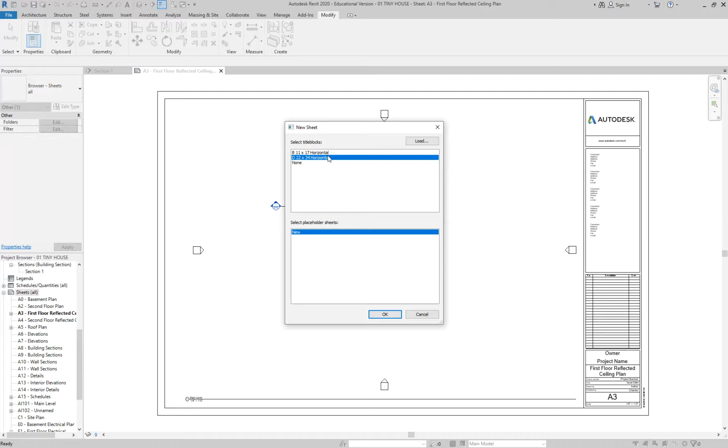And just grab the right size and it'll make it for you. Okay, good. Next week when we come in, we will continue working on the modern casita and the tiny house, so just keep working on those models and bringing them in. I can't remember what we're starting next week—I'll look in just a minute, but I'll have to look at our schedule and see.

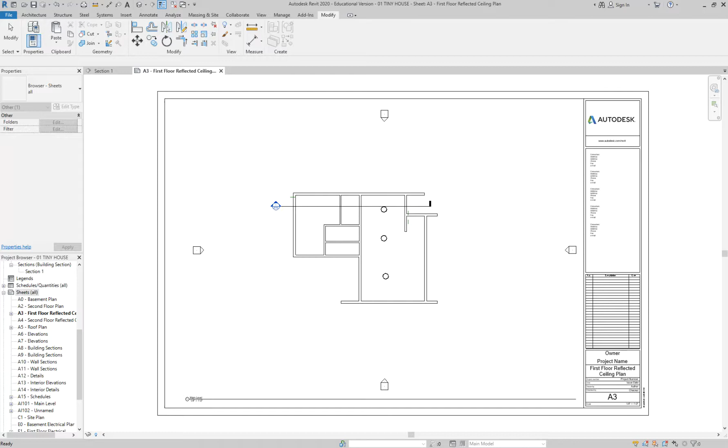I changed things up a little bit this semester to accommodate the residential design class, so we're going in a little bit different of a pattern. David, did you have a question?